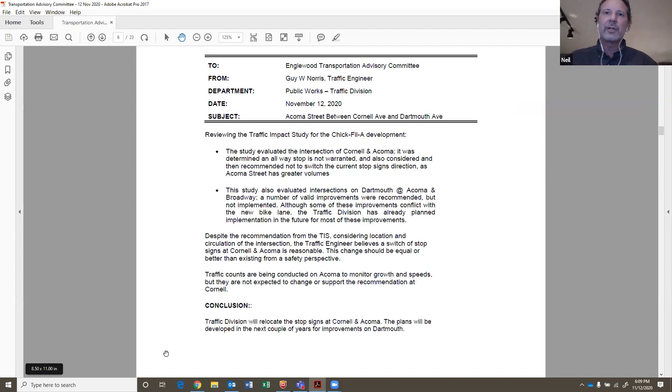Unfortunately, let me go back to the name of the gentleman who provided this comment at last week's meeting... That's right, Mr. Burton. So apparently he's not here at today's meeting, but regarding his comments on this very intersection, I think this is in keeping with what his wishes and thoughts were for an improvement as well. So if he's out there, I hope he sees this and that the city has addressed it.

Chair Sarno, we will reach out to Mr. Burton as well to let him know what the plan is.

Okay, great. That was going to be a follow-up question I had, so I appreciate that. And for these kinds of changes, is there a protocol for notification of nearby homes or businesses? How does that work on your end?

I don't know about notification, but typically if we add a stop sign, or in this case reverse the direction, we'll add red flags on top, if you've seen those before, just to bring more attention to the public that something has changed. We'll also talk about maybe doing a postcard to the immediate area, giving the reasons why we're doing this, within maybe a 2-block radius of the intersection.

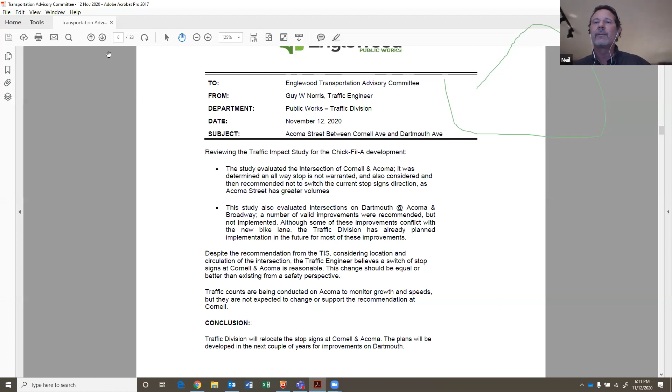Okay, Lorraine, back to our next item. I believe this is it.

The Safe Routes to School program, Colorado Safe Routes to School (SRTS), uses a comprehensive approach to make school routes safe for children walking and bicycling to school. Although Englewood has previously participated in the SRTS grant program, the city did not have the resources to submit a grant application for the next 2-year cycle, which closed at the beginning of November. Beyond this specific grant process, Englewood has been striving to move its own SRTS efforts forward. Early in the year, Englewood installed pilot placemaking improvements on Dartmouth and Kenyon in support of SRTS, and additional in-street yield-to-pedestrian signs have just been deployed as part of this pilot effort. SRTS improvements have also been a major factor as the traffic engineer identified and scoped a new traffic safety project. As an example, Tufts multimodal improvements are specifically being prioritized due to the two elementary schools along that avenue.

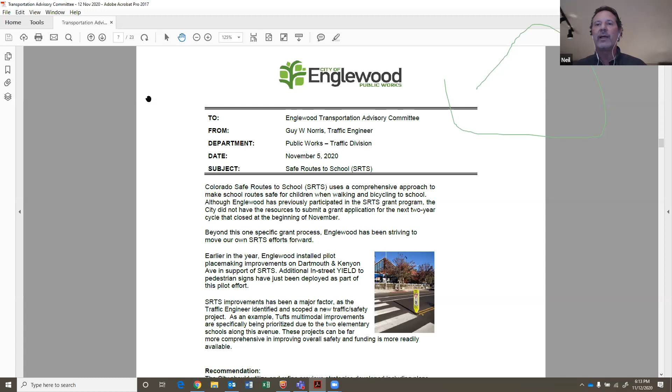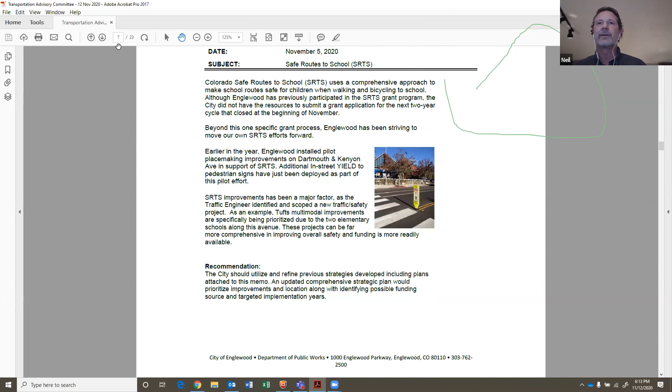These projects can be far more comprehensive in improving overall safety, and funding is more readily available. The recommendation is that the city should utilize and refine previous strategies developed, including the plans attached to the memo. An updated comprehensive strategic plan would prioritize improvements and locations, along with identifying possible funding sources and targeted implementation years. That was the memo from Guy, and I think we go into a map here that gives a bit of an overview.

I know this has been part of our discussion here at ETAC for several years, on and off. We've been looking at this and highlighted its importance, and I think the city has most definitely come around to improving the visibility and importance of it. I can see that.

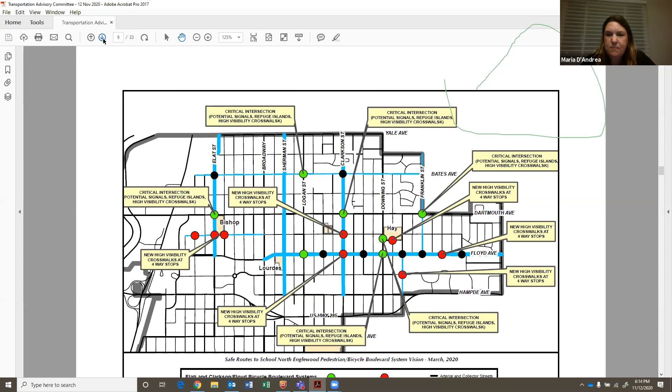So is there anything, Director D'Andrea, that you'd like to speak to this? Is this more in Guy's arena? Lorraine, if you could go back up one page to the previous map, that first map after the memo.

You can see there in the memo when Guy was talking about Tufts, which runs east-west, both Clayton Elementary and Cherrelyn, those two schools right there. That's the corridor we're focusing on. We just repaved that area, and so we're going to put up some improvements where those two red dots are and where the green dot is. The green dot indicates a signal right there.

And so we're just going to focus on that corridor. With the repaving, we repainted all the crosswalks along there and upgraded the pedestrian ramps to make that a more walkable area for students.

Very good. Has there been any— oh, go ahead. Yeah, that crossing of Broadway right there is just identified as a key crossing. Are they going to be doing bump outs to shorten it up, or something like that? Do you know what they're going to do there?

That's what we'd apply through Safe Routes to School for, likely to do that. We did something similar up at Broadway and Mansfield a couple of years ago where we built those—that was a Safe Routes to School project. So we'd probably do something similar down here.

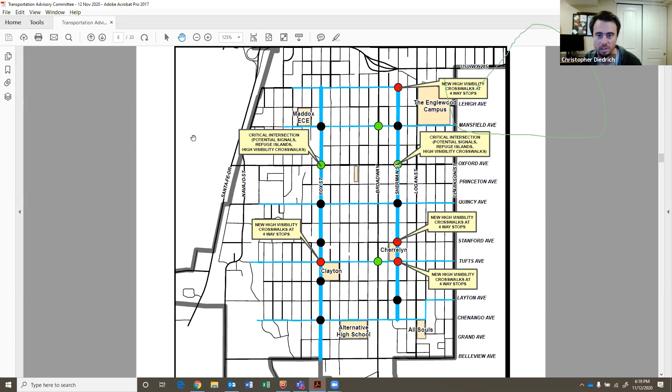I think this is looking really good though, and I appreciate having the map and the materials and the memo stuff. This looks really good.

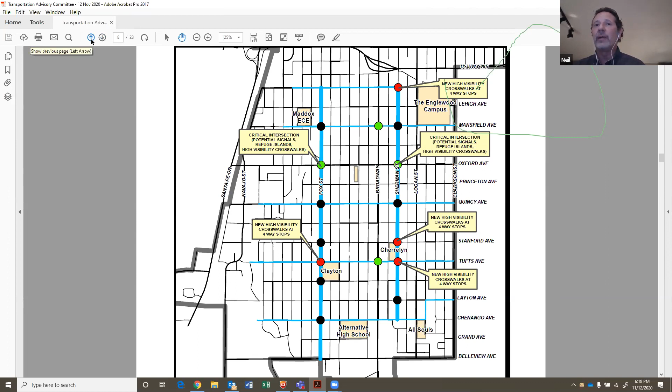So Director D'Andrea, regardless of not going after any grants, as Guy mentioned in his memo, the city's still able to move forward with a majority of these proposed improvements. Is that the idea, over time? Yeah, over time. We put together those two Safer Main Streets applications, along Dartmouth in the west end of town, and the Sherman bike lanes. We just didn't have the capacity to submit something for the Safe Routes to School grant this time, but our intent is to do all these improvements over time, picking them off as we go and incorporating other projects, like the stormwater stuff, where we can make those all fit together.

I will say that I have seen a number of those in-street yield ped signs increasing throughout the city, so I think that's very good. Notably on Dartmouth at the new crosswalk installed there not too long ago, and other places as well.

I think that's good. It really just reinforces the pedestrian friendly aspect, and certainly in a crosswalk it kind of trains people that yes, you need to yield for pedestrians there.

We actually had one citizen complain to us. She didn't like it, thought it was an eyesore - she lived on one of the corners. Well, you can't please everybody. No, if it's one complaint out of a corner, I think the majority would still be in favor of that.

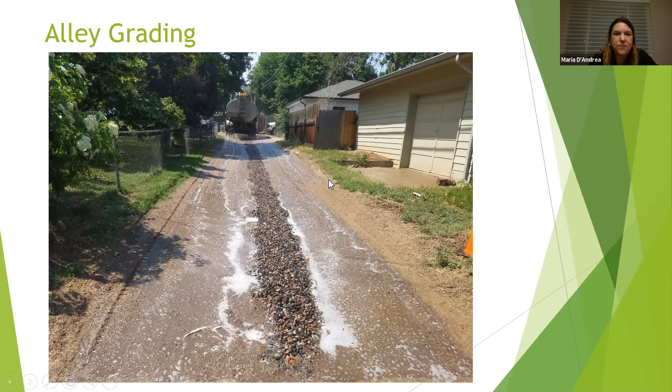Thanks for clarifying that, Maria. I had that in my back alley as well too, and I was curious what was being used. It was like mag chloride, or I don't know what was coming out there.

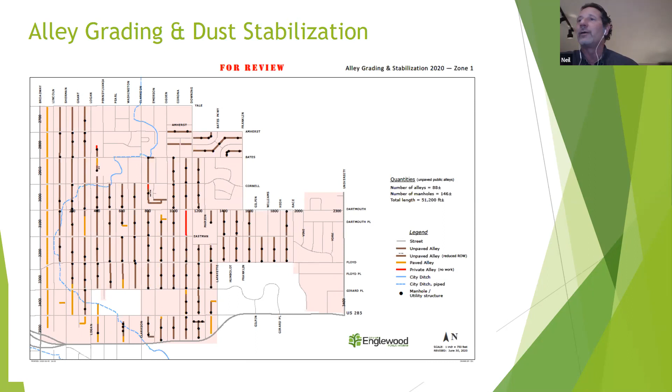It's a proprietary product called DuraBlend. They use it a lot on gravel roads, like in more rural areas, county roads, and it holds up to heavy traffic really well. So we thought it was a good application with the trash trucks especially. It seems to be working very well so far, including in my back alley there. Good.

So we did area 2. This past year we're working in area 1. We'll probably have to finish that in the spring. And then again, we'll be in zone 3 with that alley maintenance work in 2021. Again, the plan is to get through the entire city.

Street staff still comes through, and if there's a particular pothole or any kind of damage for whatever reason, we'll still come in and fix that. But this is meant to be an intensified effort to get better drainage in the alleys.

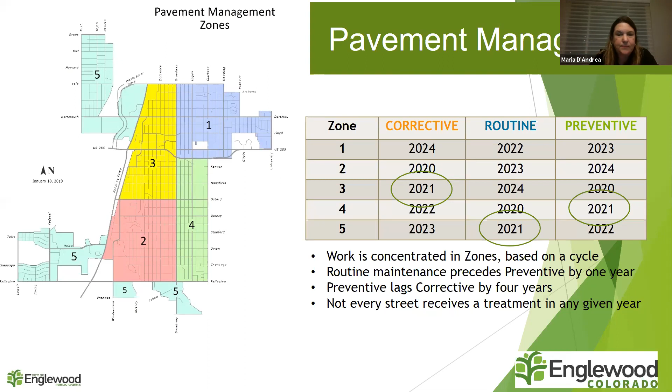Also, for the most part, sanitary sewer runs down the alleys, not in the streets. So if somebody has a sanitary sewer service repair, they're digging up the alley to get to that, and that usually creates a pothole, or they're backfilling it with not so great material. That usually will cause some failures or a sinkhole or a pothole to occur. So we're always on the watch for those as well in relation to sanitary sewer service repairs.

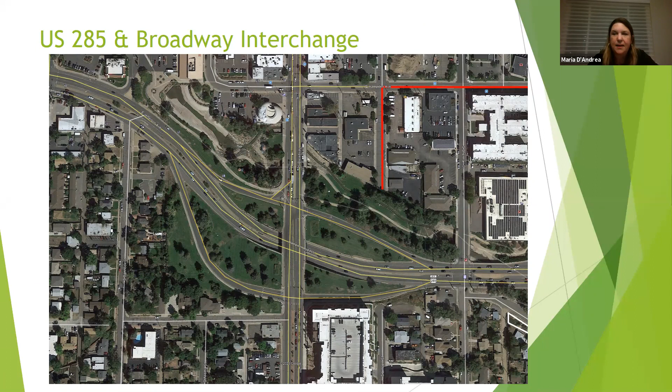Good, so excellent. So we're actually awarding the contract for design at the December 7th city council meeting. And then design would kick off probably right after the first of the year. Our goal would be to start construction probably early 2022 as well.

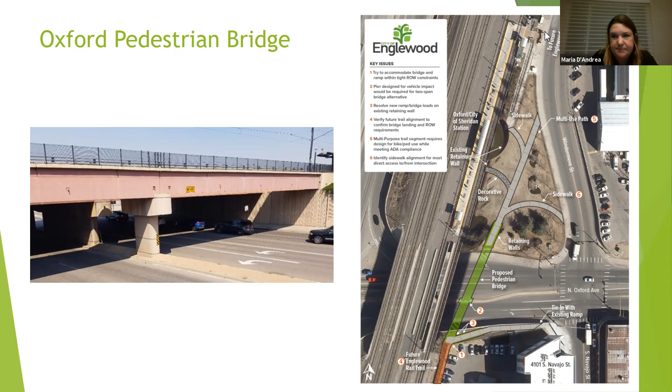Thank you. So we're still pursuing this, hopefully going out for bid.

Sorry about the dog here. He's whining. Why are you whining?

So we'll have two through continuous lanes plus a left turn lane, plus sidewalks over the bridge here on Dartmouth, plus upgraded traffic signals. We've expanded the scope of the project a bit because we were able to get that additional highway safety money. We had already bid this out once and it came in fairly significantly over budget. So we think repackaging this, adding some additional funding, will be able to get us in the ballpark to get this done. The plans are nearly complete with these revisions.

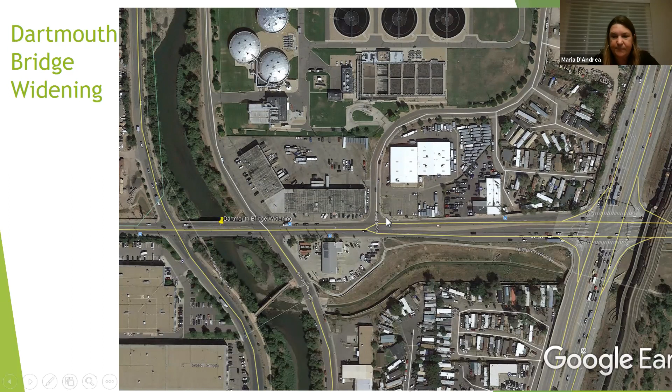All right, any other questions on that one?

So we'll continue just like we have in the past, doing our concrete repairs and pedestrian ramp modifications. This was a project on Tufts this past year, where we replaced, I believe, 84 pedestrian ramps, and we'll continue to do that. That's in accordance with the Americans with Disabilities Act. We want to make sure we're making good progress in keeping up and maintaining our pedestrian ramps throughout the city so that they are accessible for wheelchairs and other people with disabilities.

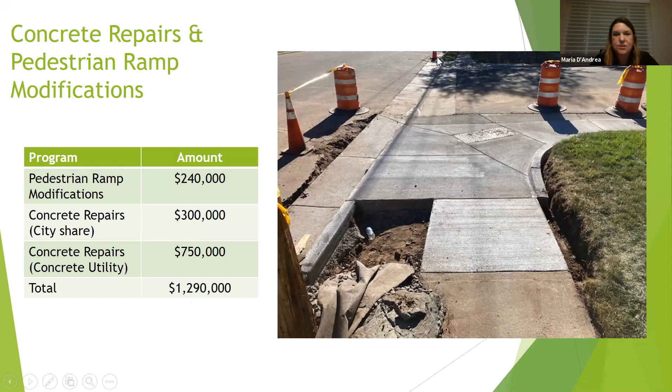Again, we'll be doing various traffic signal equipment upgrades and repairs. Chris Groth has talked about this in the past. He's able to manage and do different things like replacing the traffic signal controller cabinets, some of the cameras, and different elements of the traffic signal system. We're not doing any full change-out or upgrades of any of the traffic signals because that wasn't funded, but we will continue to work on various upgrades to different parts of the systems throughout the city.

We are going to be completing our inventory of the traffic signals later this year, and that will help us prioritize what those improvements are.

Another project we received federal funding for was the US 285 congestion mitigation study. It runs from the city of Englewood, where the turquoise color is, all the way from Sheridan in the west, at Knox Boulevard and Lowell. Knox Court is the traffic signal on 285, then you have Federal, which is a grade separated interchange, and another signal at River Point leading into the development in Sheridan. So there's those two signals on the west side.

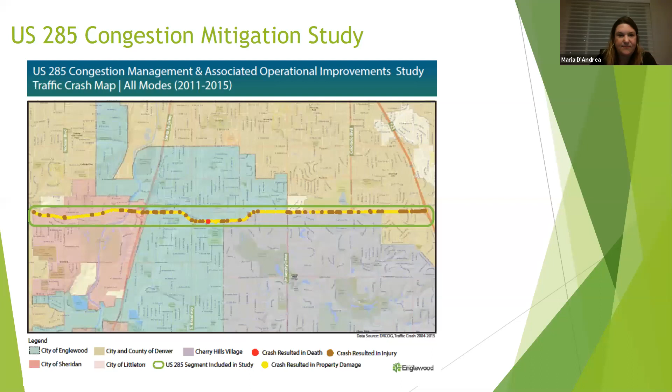We did put out a survey to the community and we've gotten about 200 and some responses, which I think is great. I really think that people are most interested in, can we still have emergency access? How does this work in relation to a signal? A lot of it is just maybe more education than people being outright opposed to something like this.

Some of the feedback we've gotten is also that people run the lights because they're old and not timed very well. So people ignore them and they'll make right turns or go through them almost like a stop sign instead of adhering to them, especially in the early morning hours. So we think this is a more beneficial element that still provides safety without the need for a traffic signal at those locations.

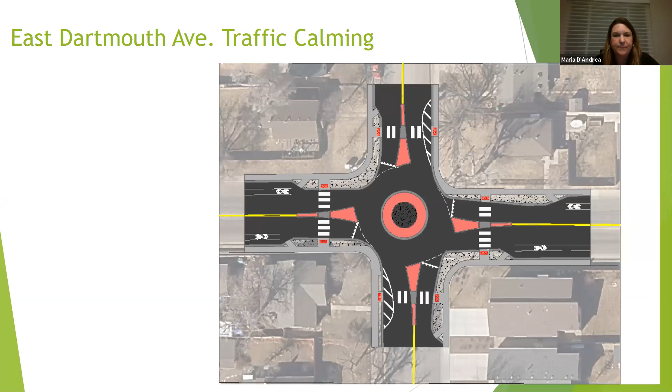Okay. All right. So I think that was it. So this just summarizes here.

Now we won't spend all of this money in 2021, but this is the extent of the projects, equaling just under $22 million of improvements that we'll be doing. So mostly design in 2021, some construction, and then a significant amount of work in 2022.

And I think that's it. So any further questions or additional follow-up you want from staff?

I guess I have a question for the group here. Would you say that these projects Maria outlined are in alignment with some of the priorities that ETAC has? From our previous meetings and discussions, I think a lot of this does speak to our priorities, but I'm curious about everyone else's opinion on that.

Yeah, I think this incorporates quite a few things. There's been a lot of topics, the alley maintenance and road maintenance stuff, and I think the city's even more vocal with the public about what they're doing. And I think people are receiving it a little better. I see some things on Nextdoor, the website, that maybe we didn't a few years ago. So it's nice - some of the things you guys have on the list here are traditional topics we've had in the committee, and they've often been part of a budget or schedule, sometimes not. But I think in general these are pretty well aligned, and I really appreciate the work you guys are doing to listen to what we have to say over here as well. We appreciate that. So for the most part, yeah, I think it looks pretty good.

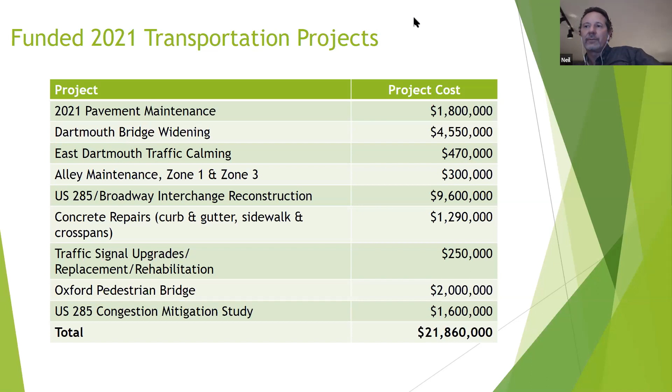Okay, Lorraine, are we to the end? Do we have another agenda item? I think that was it.